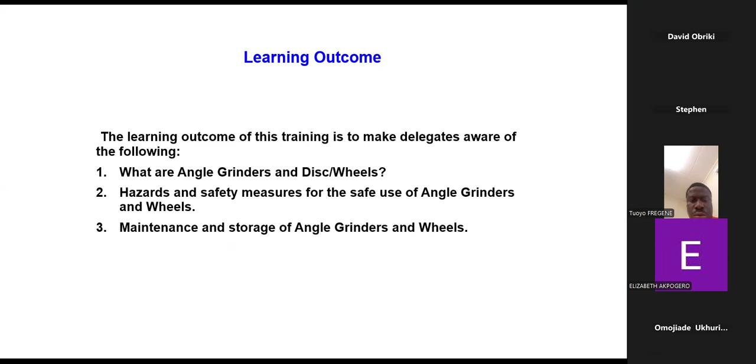So, what is the learning outcome of this training? The learning outcomes of this training are: one, to make the delegates aware of what angle grinders and discs or wheels are. During the training, I will be using disc and wheel interchangeably. They both mean the same thing. Two, the hazards and safety measures for the safe use of angle grinders and wheels. And three, maintenance and storage of angle grinders and wheels.

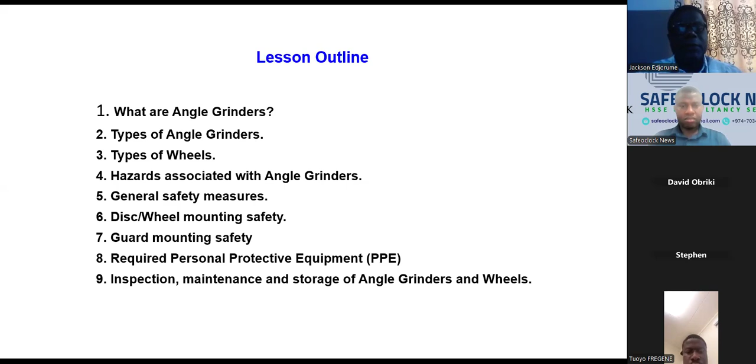The lesson outline for this training goes as follows. One, what are angle grinders? Two, the types of angle grinders we have by way of their energy utilization. Three, types of wheels or types of grinding disc. Four, hazards associated with angle grinders. Five, general safety measures. Six, disc mounting safety or wheel mounting safety. Guard mounting safety. Required personal protective equipment, PPE. And last but not the least, inspection, maintenance, and storage of angle grinders and wheels.

What are angle grinders? Angle grinders are power tools that are used for cutting, grinding, and brushing or cleaning of workpiece surfaces with the installed disc. These include metal work such as cutting rebars or cutting steel plate, grinding or polishing of welding joints, cutting of ceramic tiles to size. These tools come in different sizes and belong to the family of tools known as abrasive wheels. Angle grinders are commonly found in construction sites and maintenance workshops. Angle grinders are one of the most prevalent tools in the construction industry.

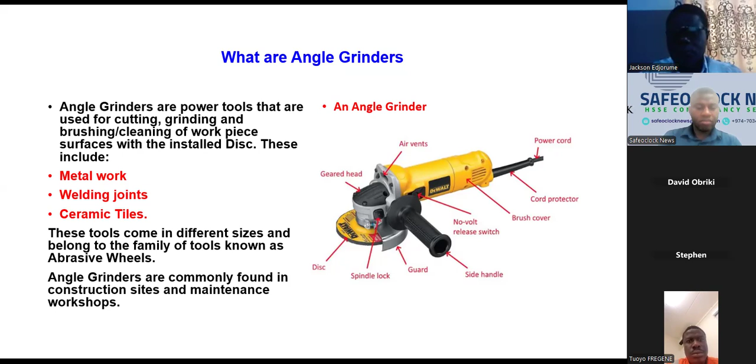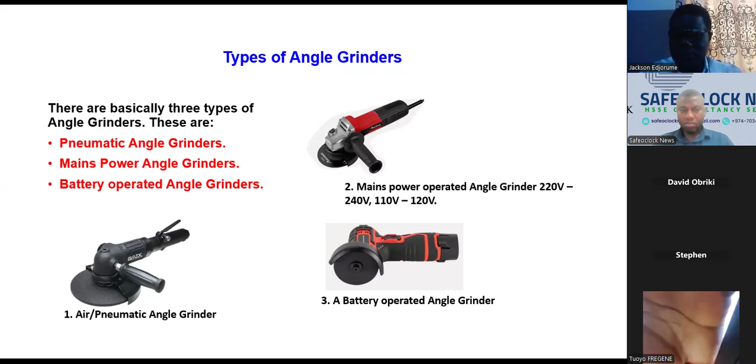Types of discs. The type of work activity that the angle grinder is intended for determines the type of disc that is installed on the grinder. These include cutting disc, grinding disc, brushing disc, diamond cutting disc.

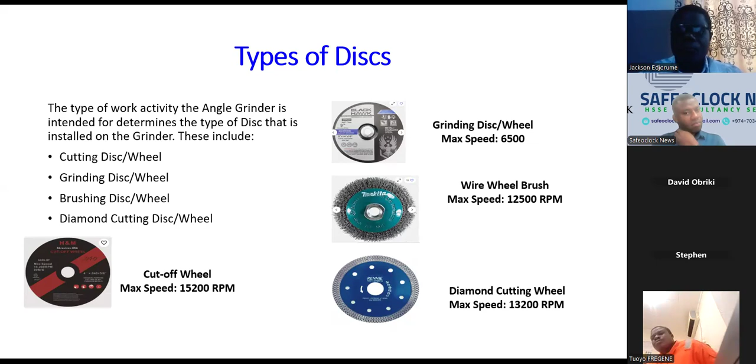Hazard associated with angle grinders. The first hazard on our list is fire and explosion. Grinding activity presents a lot of sparks, and it is actually a naked flame operation. And so if sparks ignite flammable or combustible material nearby or below grinding operation, fire or explosion can easily ensue.

Number 2 is noise. Grinding activity generates a lot of noise. 3, foreign objects getting into the eyes. 4, electric shock from frayed or defective power cord. 5, high-speed flying particles. A grinding wheel speed ranges from 6,000 to plus 11,000 RPM or revolution per minute.

From the grinding wheel itself, if the disc gets shattered in the course of the operation, the pieces travel like a bullet, and so it should not come in contact with anybody. And also from the workpiece being grinded. Another hazard is inhalation of dust and fumes generated.

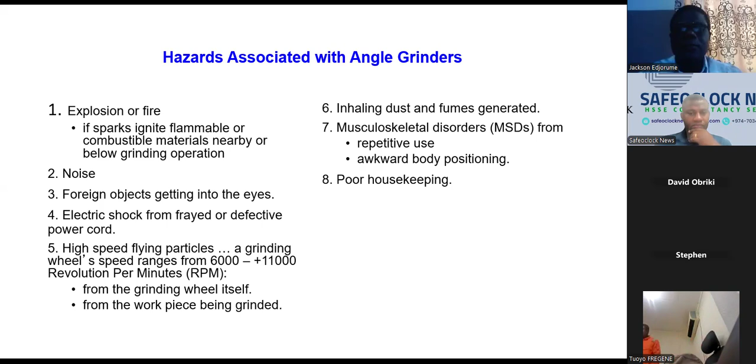So what are the control measures? Number one, before you carry out any grinding activity, develop job safety analysis. Then obtain naked flame hot work permit. Barricade the work area so that non-authorized persons will not access the area. This is followed by installation of warning sign asking non-authorized persons to keep away.

What most workmen do on site is that instead of using this disc spanner, they improvise other methods of installing a disc. That is not allowed. 8, check the validity of the disc before installation. Do not install expired disc.

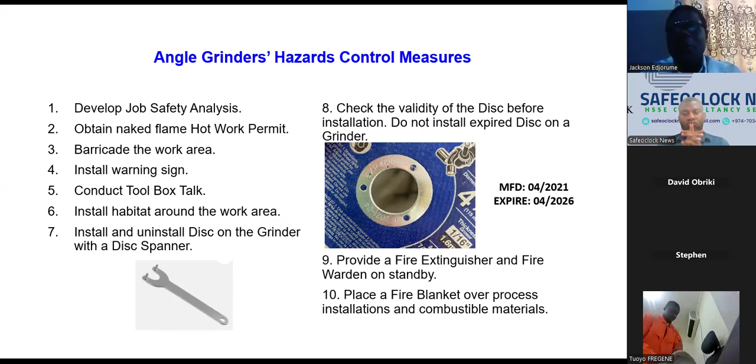11, do not keep the grinder on the bench or on the floor until the wheel has come to a complete stop. What most workmen do on site is that as soon as they finish grinding, because they want to save time, they want to make good progress on the job, while this wheel is still spinning, they will just drop the grinder on the workbench and begin to do other things. That is not allowed.

12, when not in use, disconnect the grinder from the main power supply. Why do we need to disconnect the grinder from the main power supply when it is not in use?

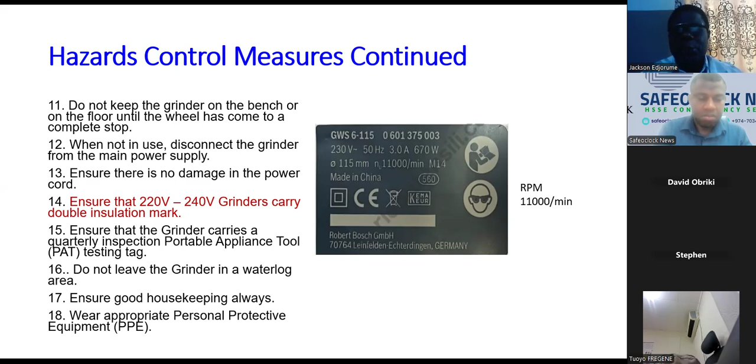The mounting wheel safety. Before you mount a wheel, disconnect the power source before adjusting, oiling, or changing accessories. Use only parts supplied or approved by the grinder's manufacturer, e.g. nut, flange, guard, blotters, etc. Ensure the wheel maximum speed is higher than the grinder maximum speed. The grinder motor should burn instead of the wheel flying apart.

Again, why do we need the speed of the wheel or the disc to be higher than that of the grinder? Let us know your answer in the comment box.

Inspect the wheel or attachment for cracks or flaws. Clean the wheel and grinder after use. Perform a ring test on wheels prior to mounting. Not applicable to all wheels or other attachments and accessories. And so how is this test carried out?

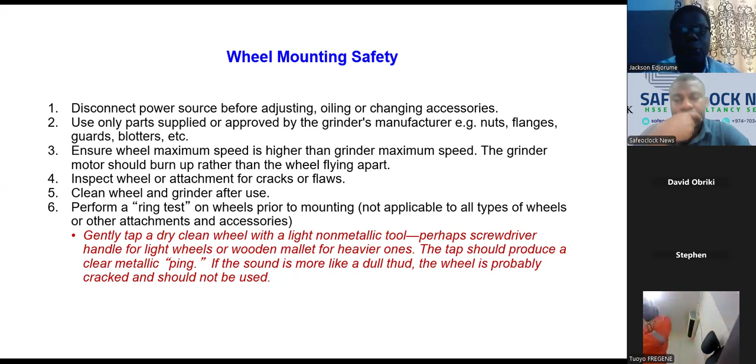It is carried out by gently tapping a dry, clean wheel with a light, non-metallic tool, perhaps a screwdriver handle for light wheels or a wooden mallet for heavier ones. The tap should produce a taut, clear metallic ping. If the sound is more like a dull thud, the wheel is probably damaged or cracked and should not be used. This is wheel mounting safety.

Be sure the wheel fits freely on the spindle. Check that the arbor hole is the proper size for the grinder to be used. The spindle nut must be tightened enough to hold the wheel in place without distortion of the flange. Ensure the guard is replaced in the appropriate position.

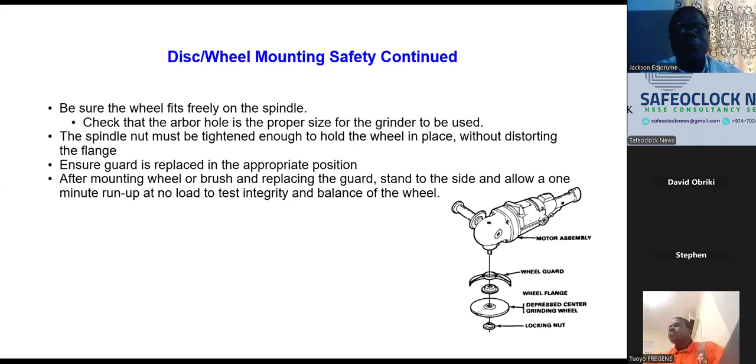After mounting the wheel or brush and replacing the guard, stand to the side and allow a 1 minute run up at no load to test integrity and balance of the wheel. What this means is that after the wheel has been installed on the grinder, stand aside, hold it firmly with 2 hands. You are not grinding anything, just press the on switch and let the machine run for about 1 minute while you are holding it away from you.

This is to be assured that the disc that has been installed is firmly installed. If within that minute duration you notice anything abnormal, like wobbling, you need to reinstall the wheel or remove it completely. And of course, the diagram on the bottom right-hand side of our screen is the exploded diagram of a grinding machine.

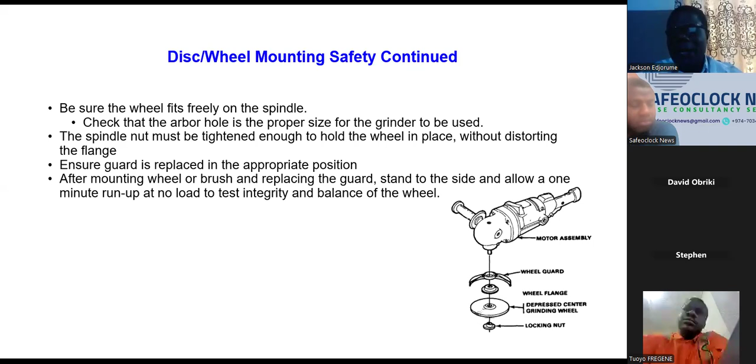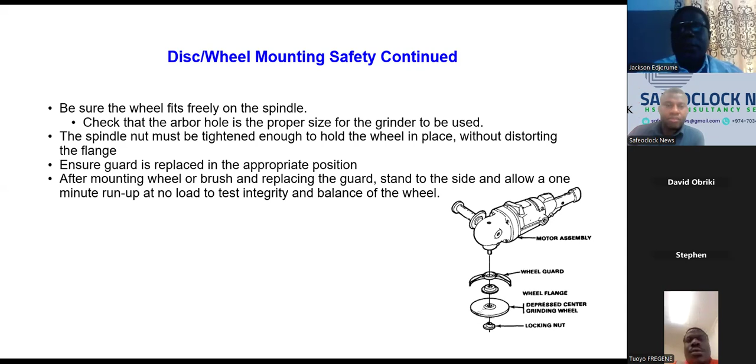So at the top, you have the wheel guard, followed by the wheel flange, and of course, the grinding wheel or disc, and the locking nut. You will recall that I mentioned earlier on that the locking nut must be locked firmly with the appropriate spanner.

Guard mounting safety. Grinders come equipped with a wheel guard that must remain in place at all times to protect the operator from flying sparks and materials. Never operate a grinder without its guard in the proper place. This requirement is actually enshrined in OSHA Code of Federal Regulations 1926.300(b).

Use a guard supplied or approved by the tool manufacturer. Report any missing, broken, or disabled guard. So the photograph to our right-hand side, once again, is a photograph of an angle grinder with the guard in the appropriate position that it should be.

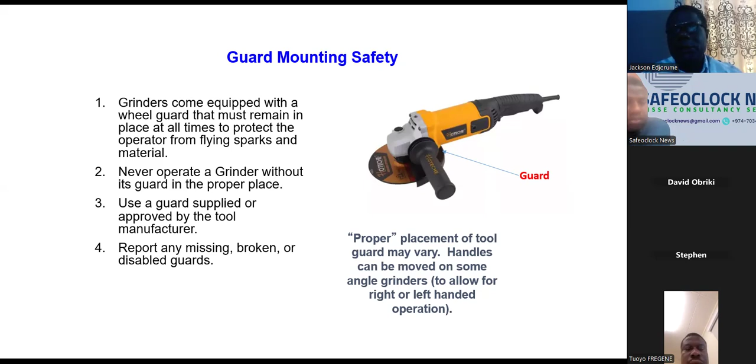And so what are the PPE requirements for the operation of a grinding wheel? Our list includes hard hat, safety glasses, face shield. If you look at the photograph to the right-hand side, the operator is wearing a face shield that is installed right on the hard hat. This is a best practice that is recommended in the industry.

Fire-resistant clothing or FRC coverall, welding jacket or apron, hearing protection. You recall we mentioned earlier on that grinding operation is a very noisy activity, so you wear appropriate hearing protection. Safety shoes, respiratory protection, especially for activities that generate a lot of dust, like grinding or polishing of concrete surfaces. And of course, leather hand gloves.

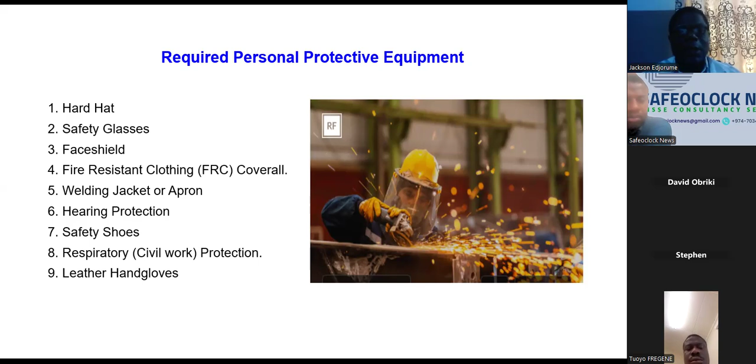Inspection, maintenance, and storage. What are the types of inspection required for angle grinders? One is pre-use inspection every day. Before the machine is used, it needs to be thoroughly inspected. The second one is quarterly inspection. This inspection is done under the program known as PAT, Portable Appliance Test, and it is carried out for all powered tools and appliances.

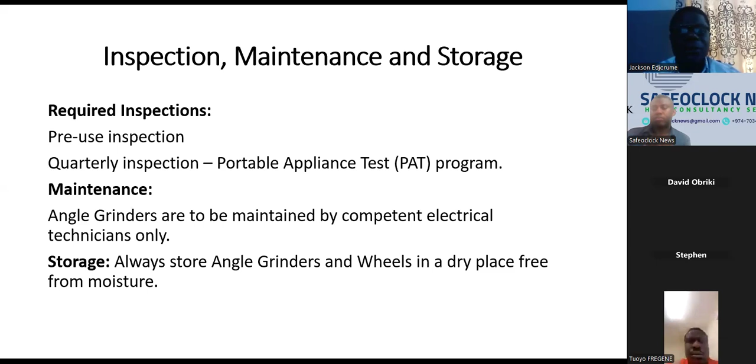And then maintenance. Angle grinders are to be maintained by competent electrical technicians only, if you are not a trained and competent... Storage: always store angle grinders and wheels in a dry place, free of moisture.